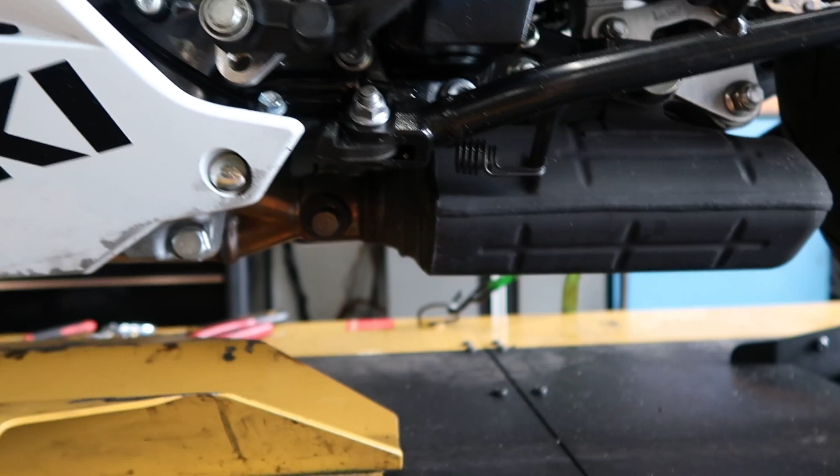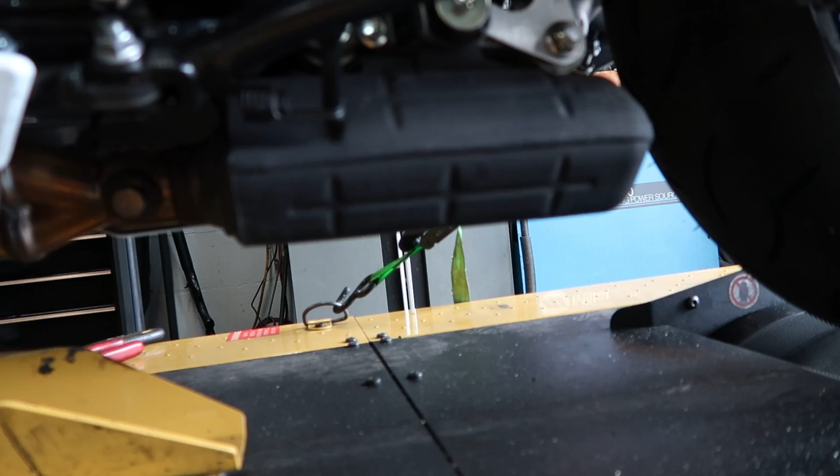So the biggie that we're gonna do today really is the exhaust. This is primarily what we're getting rid of, which is the catalytic converter, okay? So here's the collector for the headers, and then it goes straight into the cat. And from the cat, we go straight out to the muffler. But these cats are really, really large. So this is something that is really restrictive.

It is better, obviously, for the environment. But again, we're in it to make more power. Technically, this is all supposed to be for off-road use only. There's our little disclaimer. Anything after this is out of our control. But for the most part, this is what we're doing here today. We have a few other little mods, nothing crazy, but the biggie is going to be the full exhaust.

We did go with a full M4 system. We will show you guys later on in the video what it is. But right now, let's start this bad boy up. Let's do some baseline runs. Let's see what this thing's gonna baseline at.

All right guys, so we got done with the baselines and it made right at 117. It was like 116.96 wheel horsepower. But anyway, we'll go over the numbers at the end of the video. Right now, we are in the middle of taking her all apart. We are on the ground today because both lifts are taken by our turbo builds, and that's gonna be a while. So right now, what they are doing is taking out the air box.

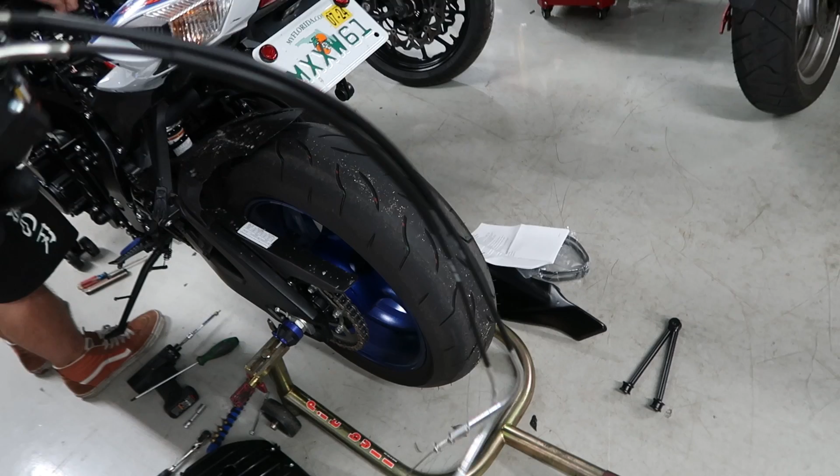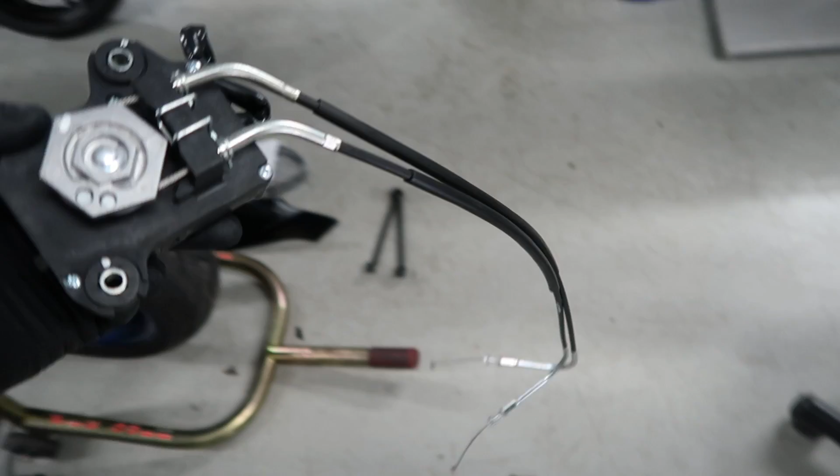We are doing an air filter, the block off plates, and then the full exhaust system. So that's what's gonna be done on this bike. So far, the boys have gotten the full stock exhaust system off. This right here is the notorious exhaust servo, which is a butterfly connected to the exhaust. Basically, it opens and closes depending on the RPMs that you're at. They say it's for low end torque, but quite honestly, I think it's more towards emissions.

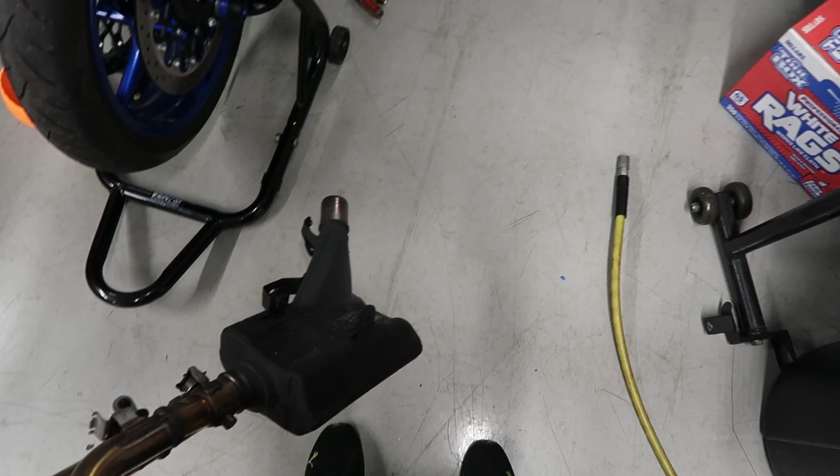And here's the old stock header, and this thing is pretty stout. We've weighed this in the past on our old videos. I don't remember the number offhand, but this feels every bit of like 18. Yeah, I was about to say 18. All right, let's do guesses. 17 or 18? 17 and a half. So we got 14.6. I'm at 16 flat. Here we go. Oh shit, Lewis. 14.4 pounds. He cheated. He went back and reviewed the video.

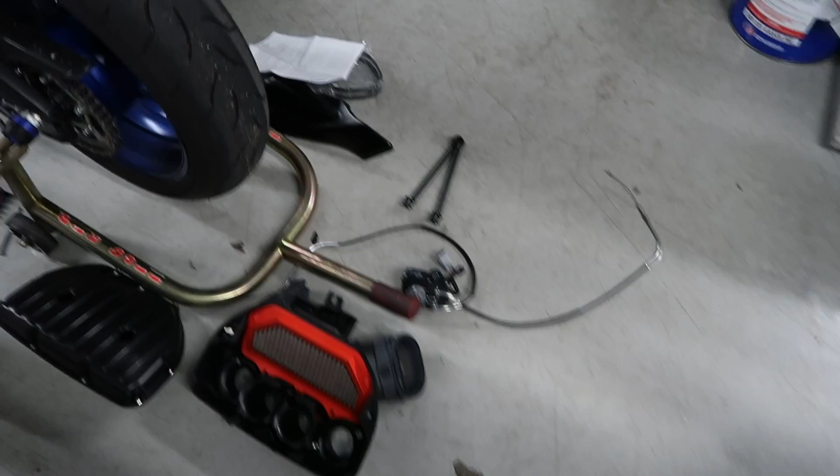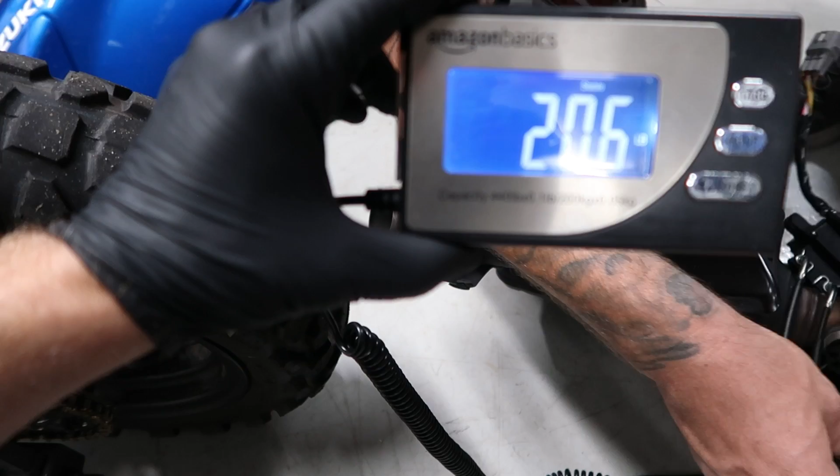Yeah, see, what had happened was... Oh, wait a minute. But we don't have the muffler. Well, you didn't say the muffler, you said the header. You hold it. I'm trying to throw everything on. Hold on, let's get some brackets, see if we can get it to balance. 19 point, damn, almost 20 pounds. This is all for you guys out there, all you viewers. Oh, wow, the cables are touching over here. 20, basically almost 21 pounds.

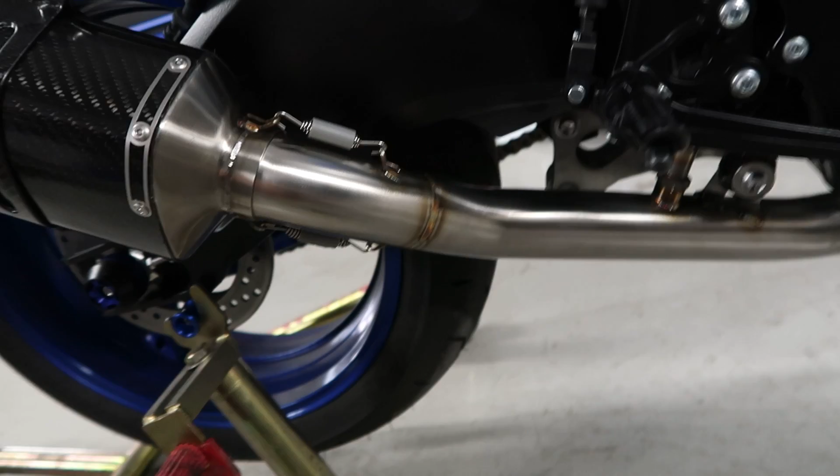All right, guys, so we got everything installed. I will say this, M4 is usually on the money, but this exhaust was pretty tough to install, I'm not gonna lie. For those of you who don't know, M4 is handmade here in the US. Basically what they do is they weld up all their header pipes on a jig or maybe a couple different jigs, and then this is obviously made separate.

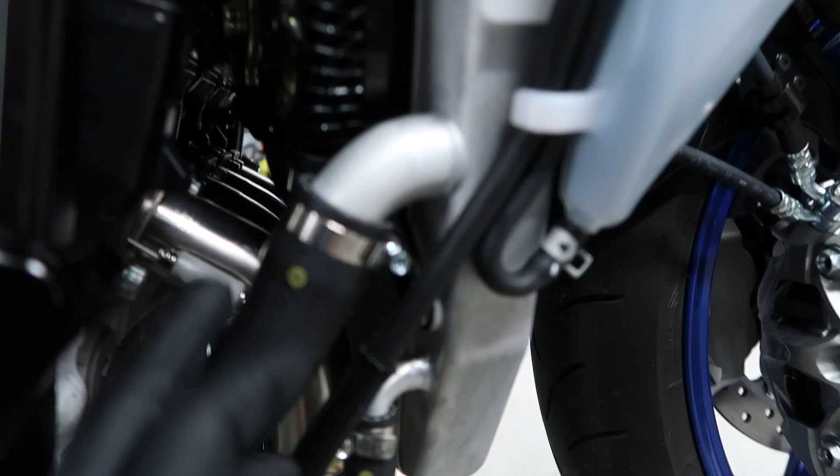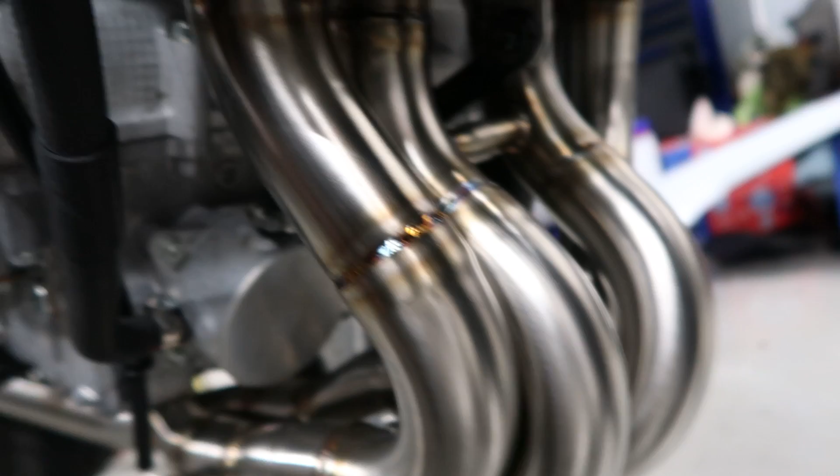You can kind of see the different material used and all that jazz. What we ended up fighting is cylinder number 3 and 2 were really tough. They have a little crossover pipe here. So they have this little crossover right here, and that little guy makes the install pretty tough. And I'm not gonna lie, the clearances on this one were extremely tight, and they were just a smidge off, as you can kind of see here.

You see how there's just these tiny little gaps in between the primary and the collector. And don't get me wrong, they definitely account for some of these, see, even right here. This one was the worst one, which was cylinder number 2. So we fought the good fight. We tried to do exactly as they listed it, but let me tell you, it was a little bit harder than what it usually was.

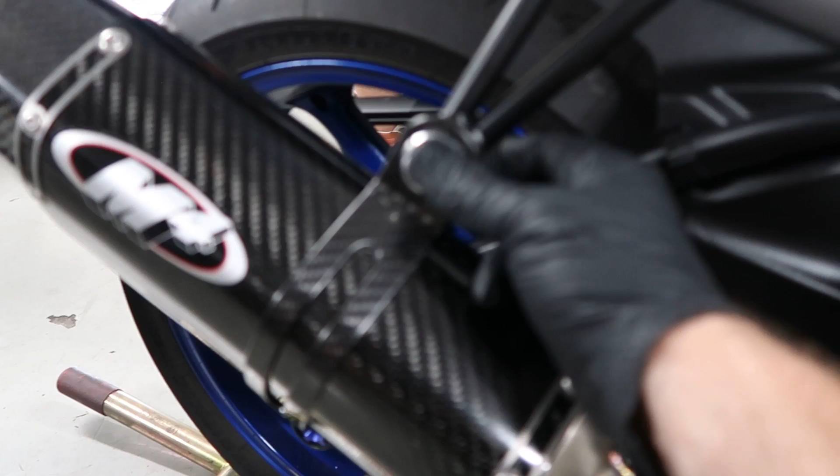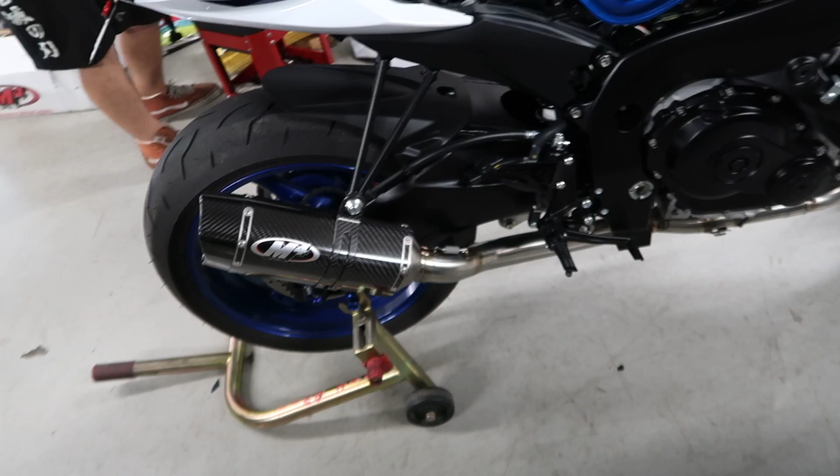So after a rigorous about 3.5 hours or so, we have finally gotten this thing all together. We had to keep playing with everything just to get it all to fit without hitting the oil pan, getting this to line up. So I'm not gonna lie, it was definitely a fight, and considering that we don't have it on the lift like we normally do, it's been a little bit more of a fight. But all in all, it looks great. We're gonna fire it up and see what it sounds like real quick.

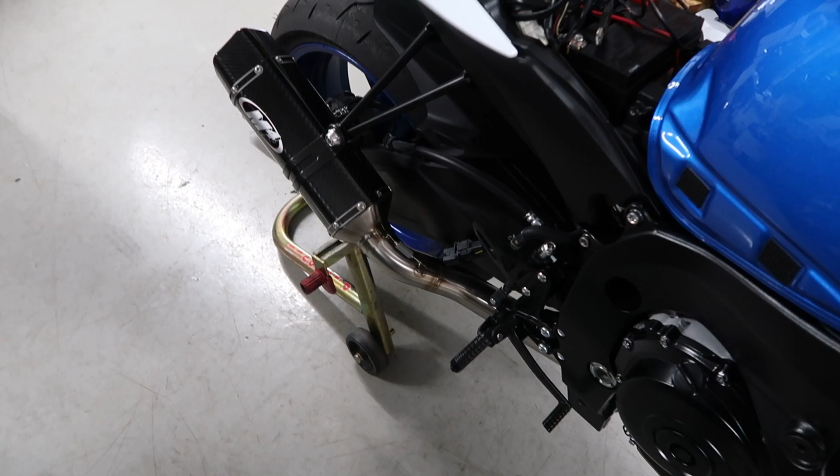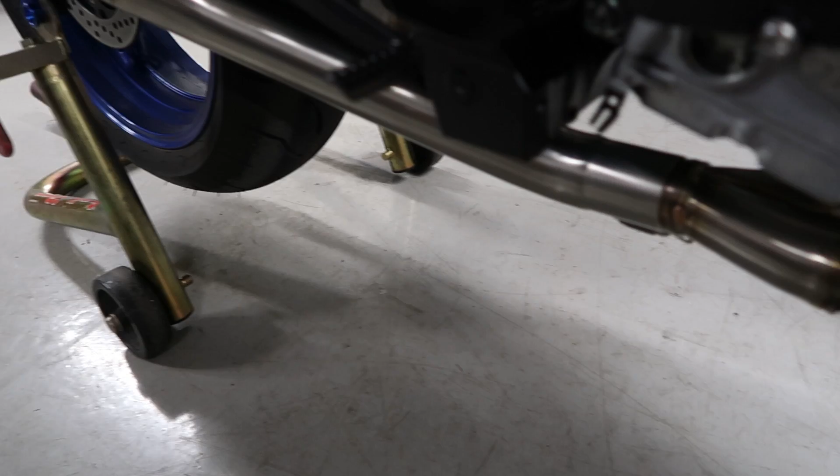Sounds good, nice and deep. And now remember guys, this does not have a tune on it yet. It still is on a base map, well, the stock map I should say. I'm gonna go back in there.

I ain't gonna lie, this one was a little bit of a pain. Maybe the intern was welding this time from M4, but either way, killer setup. I love it, I'm digging it. I like that they've extended the muffler a little bit longer than the older models. Well, it looks it at least, maybe because it's sitting on the outside now instead of tucked underneath. They used to do the Street Slayer. That was a very popular one, and it was a shorty underneath.

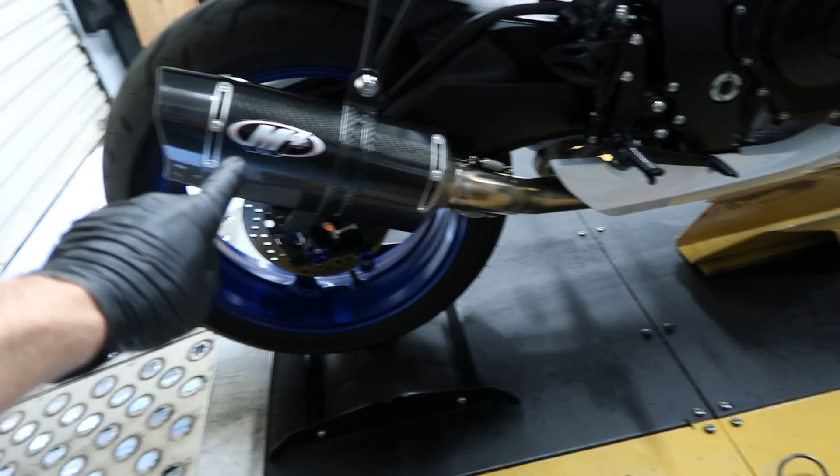And now they're doing this Tech 1, it's kind of taking off, and I'm not gonna lie, I like it. I like the shape of the canister. It's got a cool little, I don't even know what kind of shape, almost like a diamond, but it's pretty sharp looking. So we finally got the GSX-R750 done, and I'm tired. That was a lot to do. But let's go over the final numbers. I know you guys are always interested in seeing the final numbers.

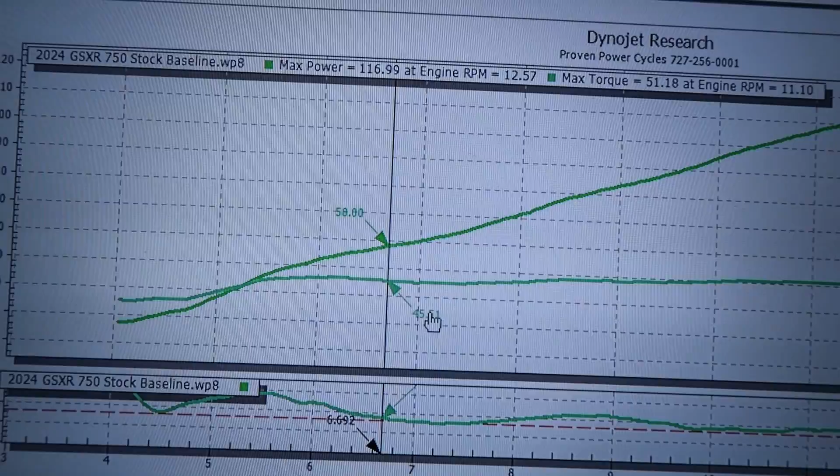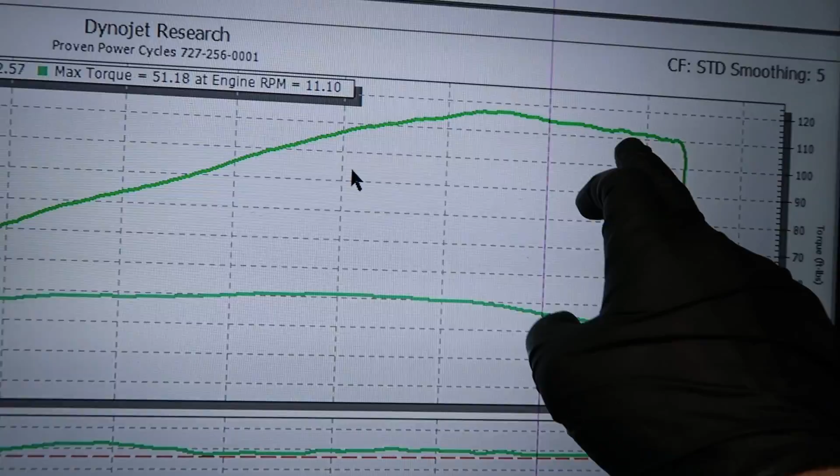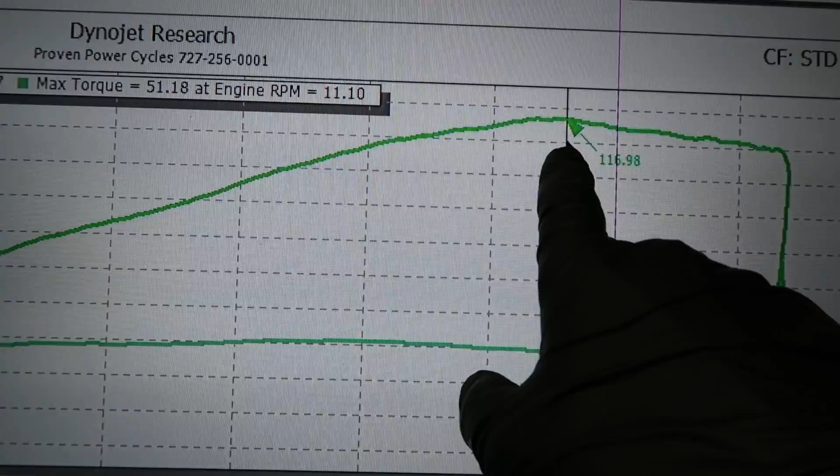So when he came in, he was making 117, we'll round up. That's close enough. We'll give it to him. He made 117 wheel with 51 foot-pounds of torque. And as you can see here, these bikes actually do have a restriction at top end, just like the older models do. So as you can see, when we get around 12.5, so about 12,500 RPM, we kind of peak out, and then it drops off after that.

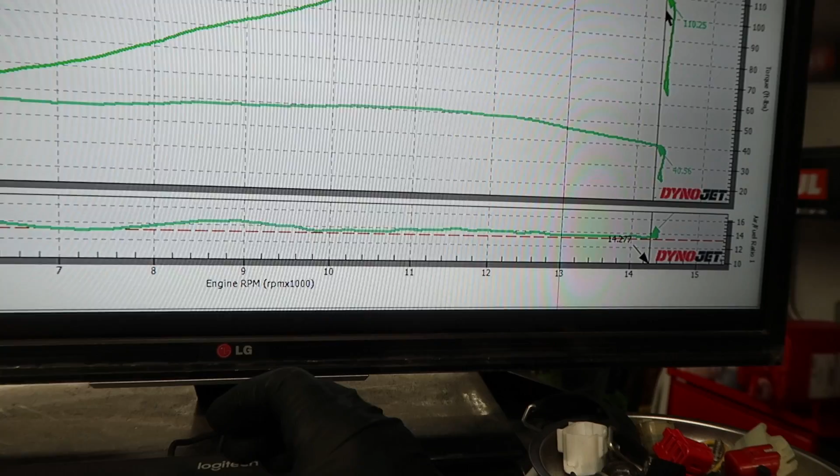So 116, almost 117 at 12.5. And then right as we get up to redline, we're actually making only 110 horsepower. So it drops 6 horsepower from 12.5 to 14, we can even say 14.3. So about 2,000 RPM, you're dropping 6 horsepower. We have a little bit of a lag down low here. Notice how it kind of changes trajectory. That's usually a little bit of a lag.

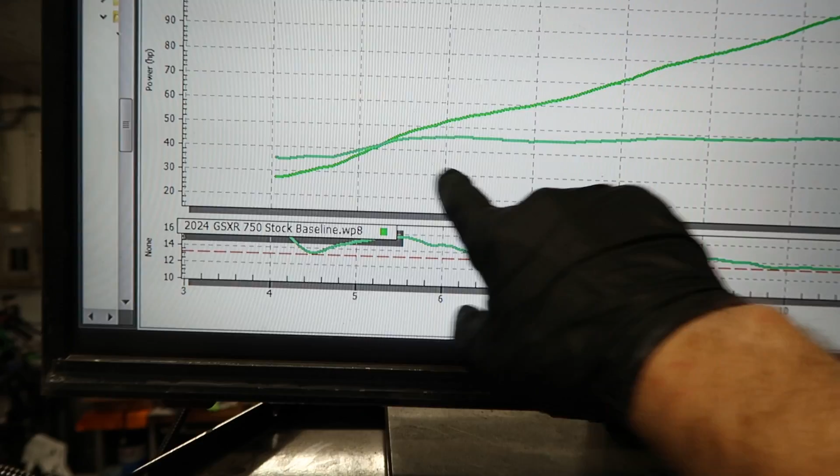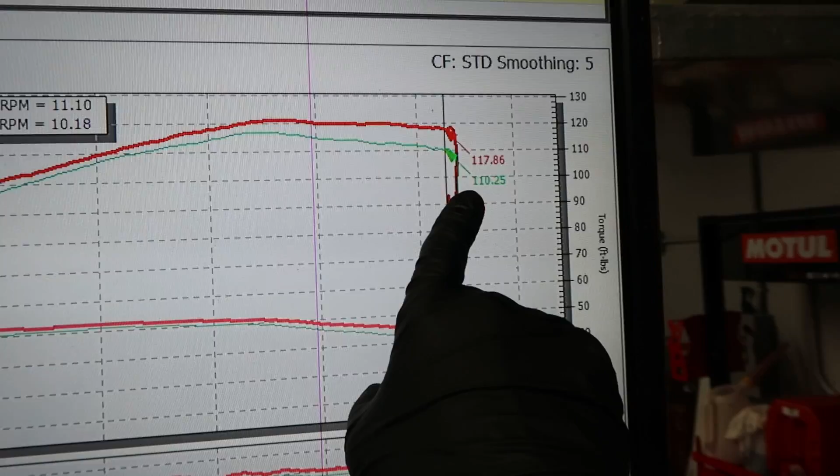And we also have a torque loss right here in the mid-range. So all in all, I'm sure this bike didn't ride great, didn't ride too shitty, but notice now when we installed the M4 pipe, we made a lot more horsepower up at the higher RPM. We picked up almost 8 wheel horsepower, about 7.5 horsepower at top end, which is actually very impressive considering that all we did was slap the exhaust and air filter in. We also did the pair delete on it.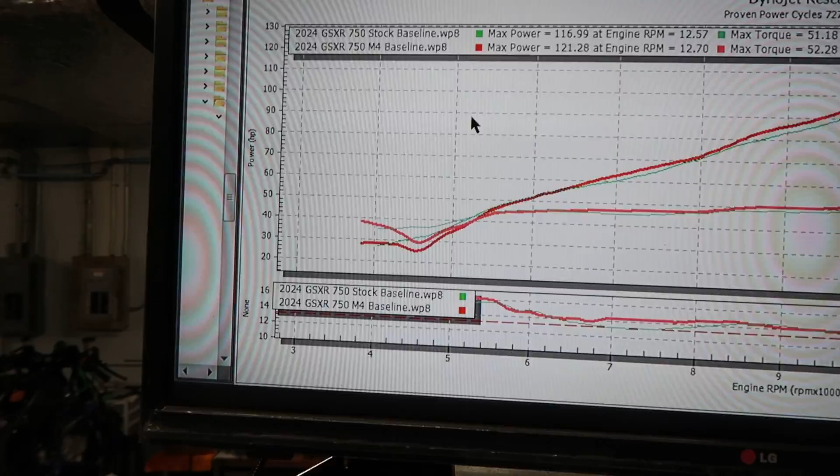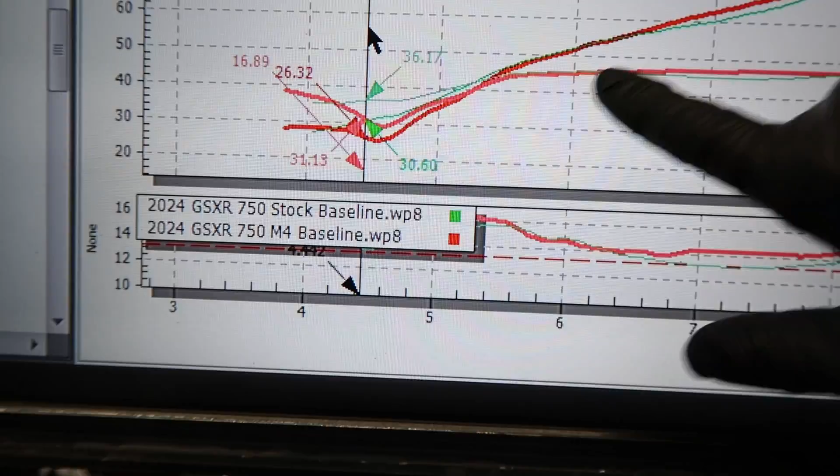But notice down low, look at what happened down low. It falls on its face. This is at 4,500 RPM. Look at this. It falls on its face and then it shoots off after that. So even though top end picked up power with installing the exhaust, it still lost a ton of horsepower down low because now it's running so much more air through the system.

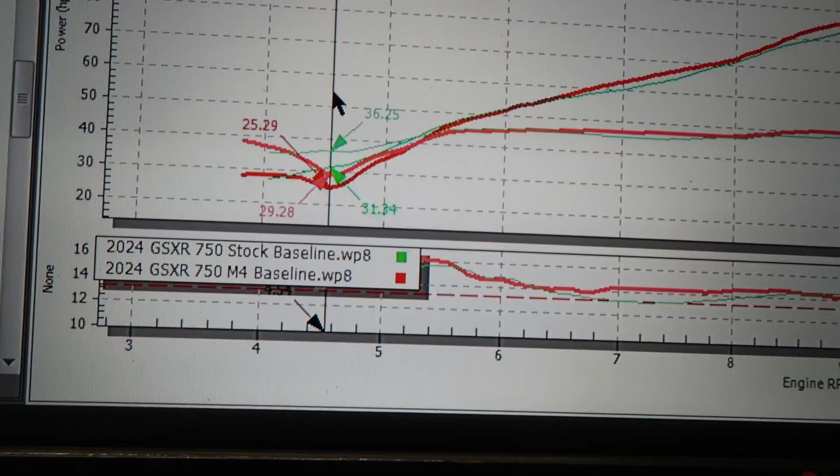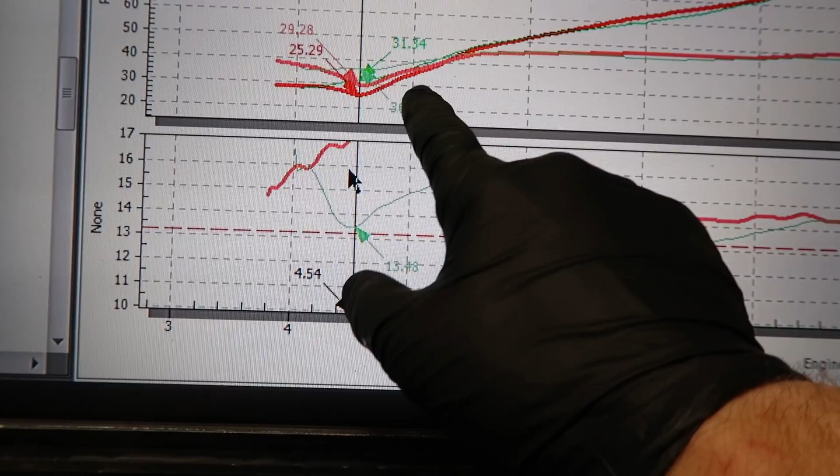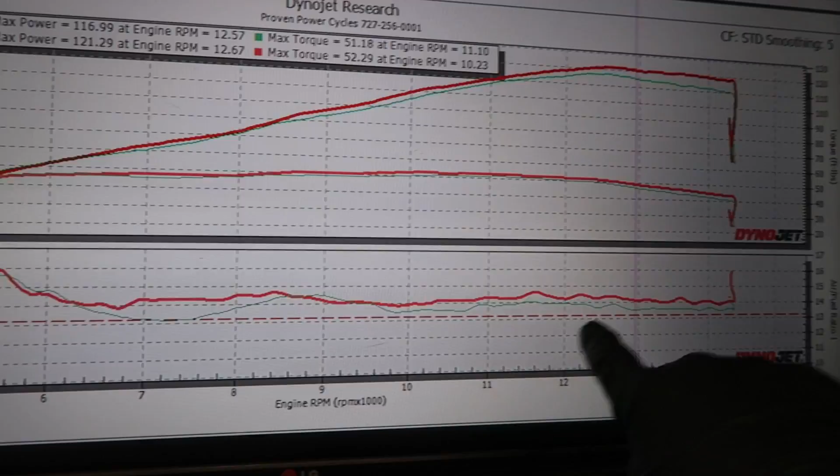Look at this. We are off the charts with our AFR. Look, it literally goes off the charts, hence why we drop so much in torque and horsepower. And then it starts to come back, and then up around 7,000 RPM and on, it picks up a little bit of power, but it picks up power from then on. Not bad, but we have also a very lean AFR mixture, which I definitely assume to be true.

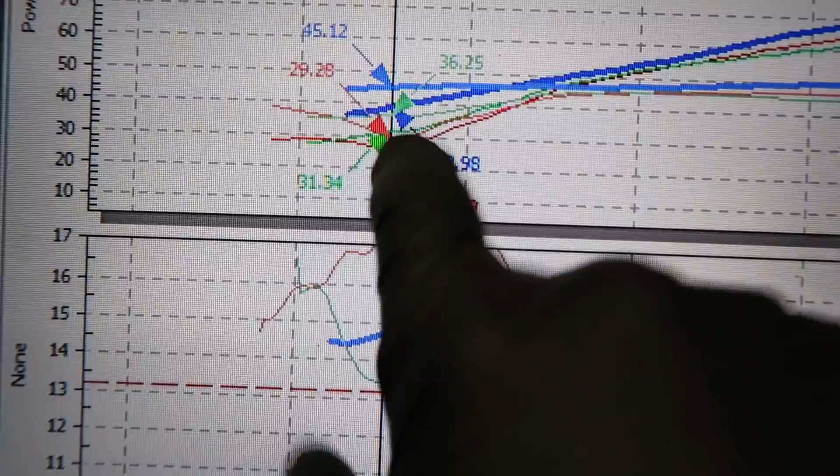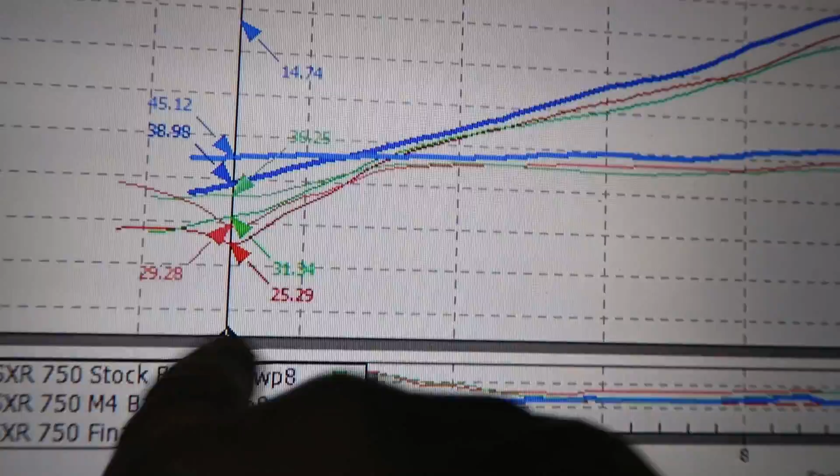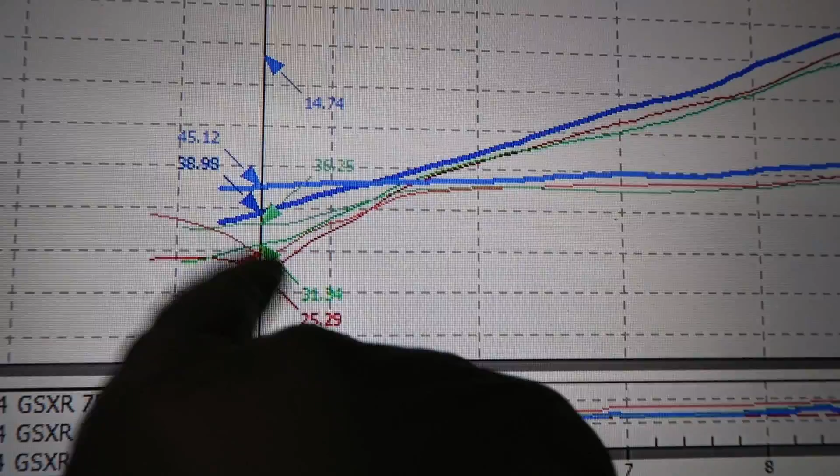Here is the final. Notice not only did we regain what it was stock, but we also picked up a substantial, here, let's do that so we can actually see it. Let's get this out of the way. So notice here, now I know it's kind of hard to read because all the numbers are kind of smashed in together here, but from stock, we went from 31 horsepower to basically 39 horsepower. So we picked up a solid 7.5 horsepower at this low RPM, which is gonna give us about a 17, 18% rate of change at this point, which is substantial for a low end RPM gain.

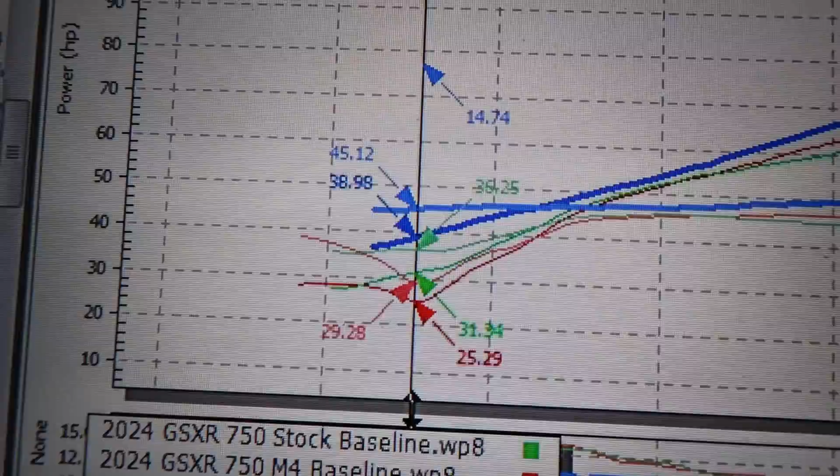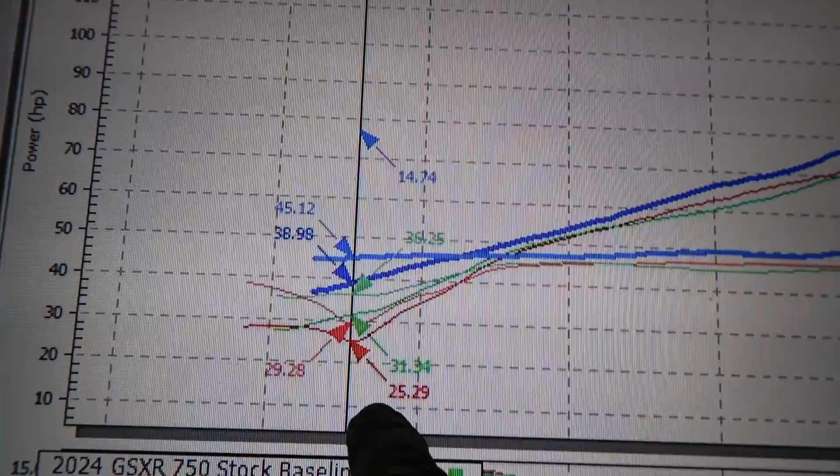Now again, that was versus stock. If you compare it with after installing the M4 exhaust and the air filter and all that jazz, we actually went from 25 horsepower to almost 39. So that is a 14 wheel horsepower gain. That's massive, massive, massive. Now you're talking about 25, 27% rate of change, which is gonna be monumental.

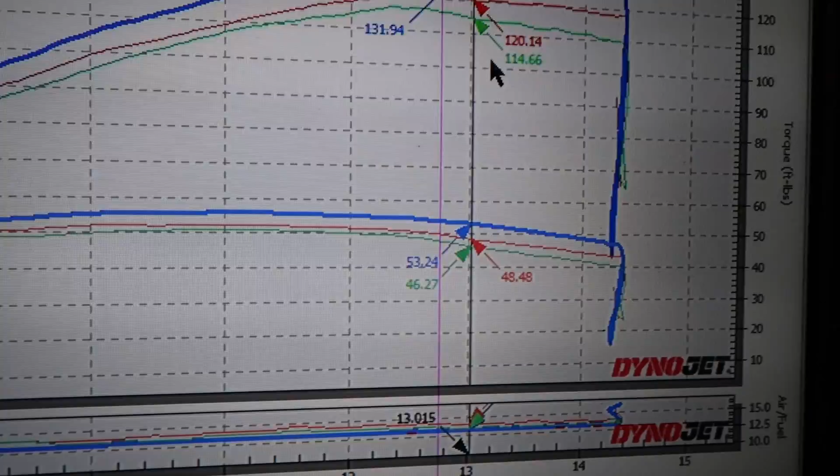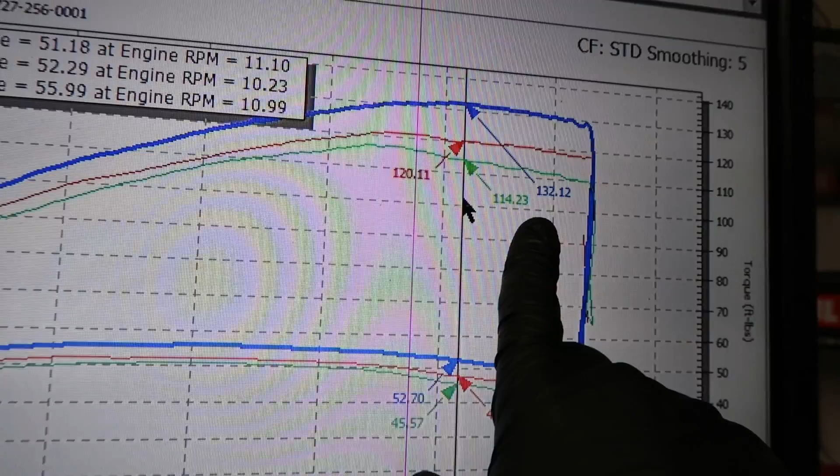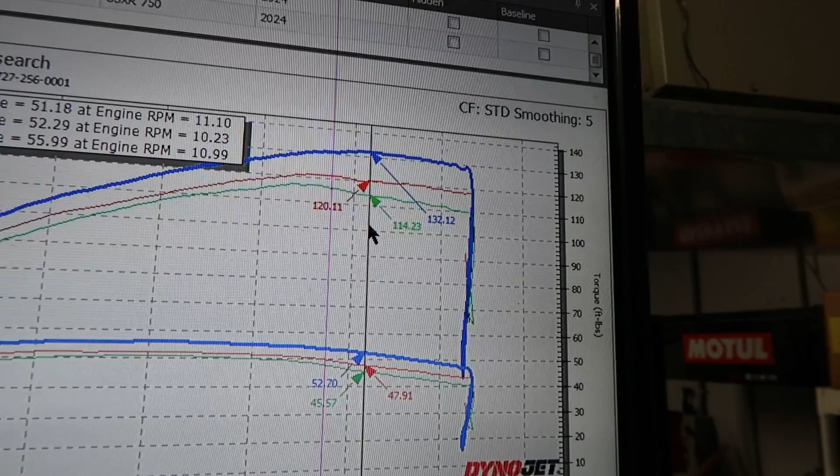So huge gain. And then let's go up here to the top end, and we went from 114 to 120 to 132. So we had massive jumps in this high-end RPM power gain here, along with the torque. Picked up a solid 7 foot-pounds of torque. Picked up, let's see, that's 16, 17, 18 wheel horsepower. So yeah, that's pretty massive. 18 wheel horsepower gains, not bad.

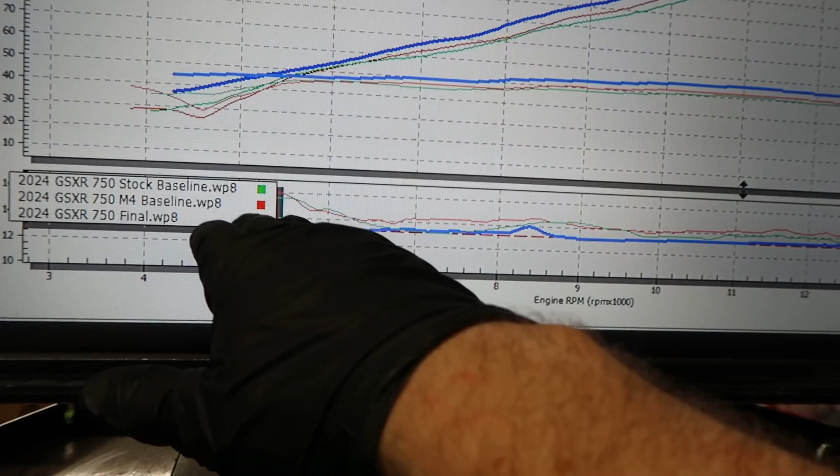AFR looks great. We do have a little blip here, but this is kind of in no man's land that I can't really touch. So we just have this little blip in the AFR here, but the rest of it is pretty streamlined. So we nailed it. Everything looks killer. Power band looks killer. Everything looks solid. They're gonna be super happy.

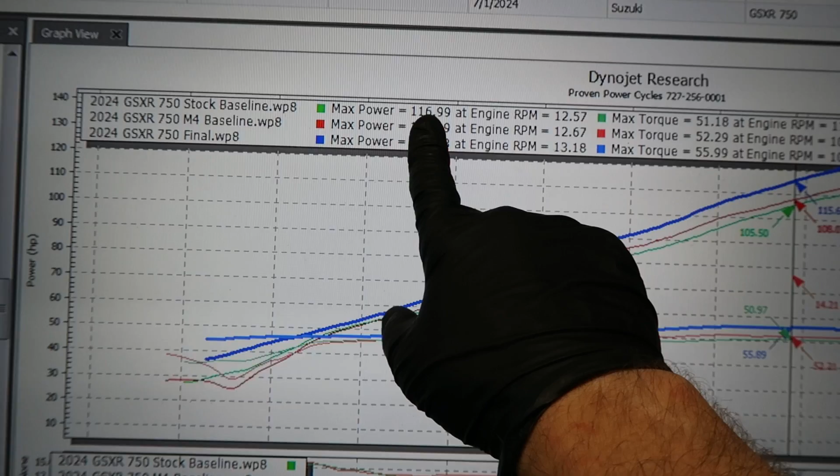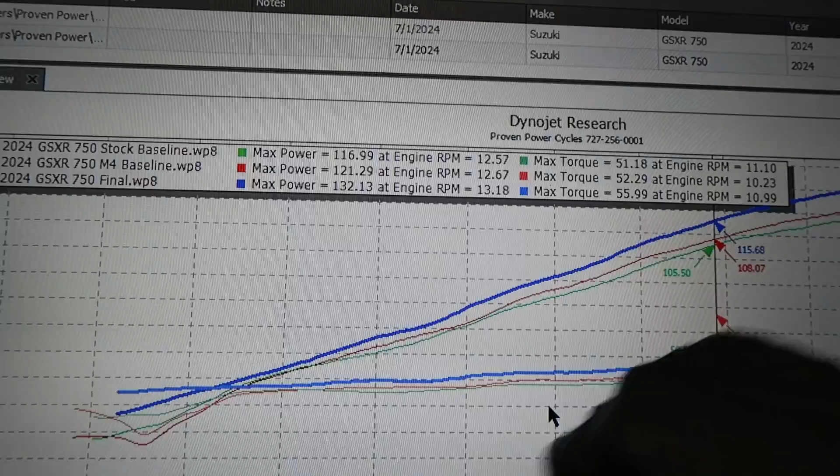Final numbers, we went from 117 wheel to 121 to 132. I would say that's not too shabby for a 1 day in and out. That's a pretty big gain for a quick in and out job here. And basically 56 foot-pounds of torque was our final, 52 with the M4 and everything installed, and 51 stock. So pretty good gains there as well, guys. Overall, super happy with this.